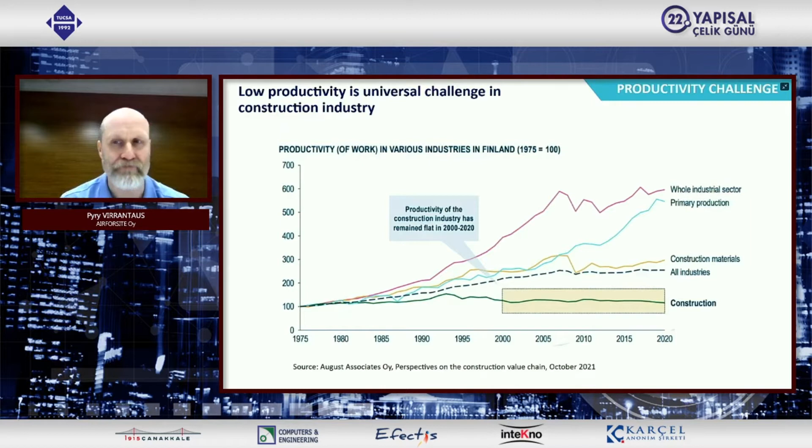Recent academic research shows that there's a huge amount of waste in a typical construction project. According to these studies, there are typical key root causes. The first one is that designs and plans are not good enough to actually succeed in the actual construction project. Second, there's a lack of achieving task readiness at the site given the schedule, and the time scheduling accuracy and timeliness is lacking. We actually see constantly in our clients' cases that the schedule is quite vague, not updated correctly, and doesn't reflect reality.

Third is logistical deviations, perhaps logistical topics like material packaging and accuracy of deliveries to the sites. There's lots to be improved here. We have many clients facing big challenges in getting the right material to the right place at the right time. Finally, number 4 is poor communication. There are hundreds of employees representing several different companies, so poor communication across stakeholders is a quite common challenge in various construction sites.

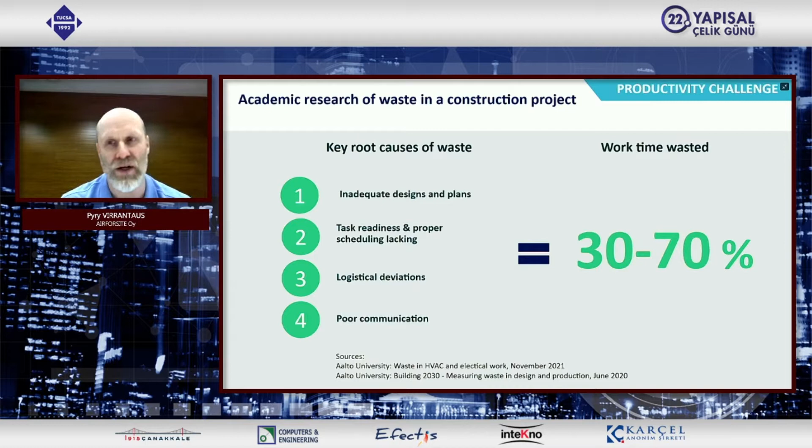Right, so now that we have identified the challenge, what can we do about it? As a company, we bring new, very practical tools for our clients to improve productivity. There are two key parts. How do we do it?

The first one is that we bring situational awareness and visual documentation for all stakeholders. What does that mean in reality? It means we use various tools like site cameras, accurate drone models, 360 video, and so on, easily accessible by any stakeholder through our easy-to-use web-based app, which I'm going to show you at the end of this presentation.

The second important point is that using this data, we and our clients are able to identify very practical points for improvement, also on task level. Combining real-time, transparent data across the site with practical analysis and improvement points, our clients are able to reduce waste and improve productivity by up to 50%. So this is quite a special improvement.

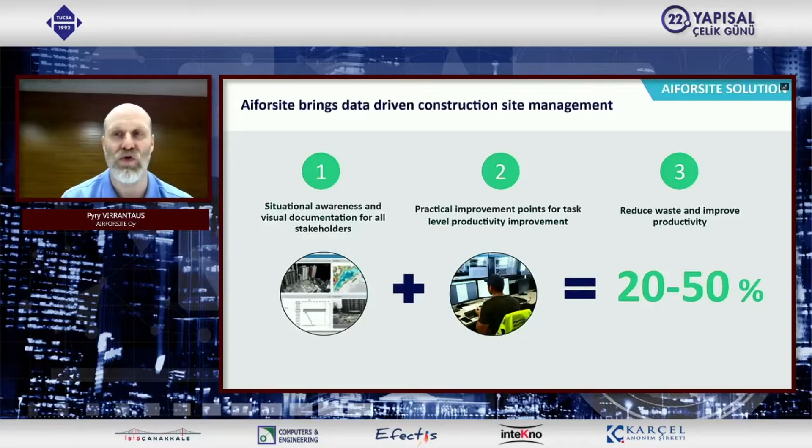So how does this work in practical terms, and how does it really operate within our clients' environments? It's actually quite straightforward in the end. The process is as follows, and this can be used in any construction site regardless of the production methodology - it can be lean production or traditional, it doesn't matter. The point here is that it's like four key steps.

There's a weekly cycle where we provide a productivity report to our clients on a weekly basis. That report is then discussed and agreed as part of the normal site management meetings on a weekly basis. This report includes all the key deviations to the project, like logistical deviations, schedule deviations, and so on.

We also propose corrective actions for those. So it's quite straightforward and easy, for example, for site managers in a project to take corrective action and agree next steps for respective employers, subcontractors, or whoever. This weekly cycle is then taken forward, which also makes sure there's continuous improvement across the project - a very practical, hands-on approach to improve productivity.

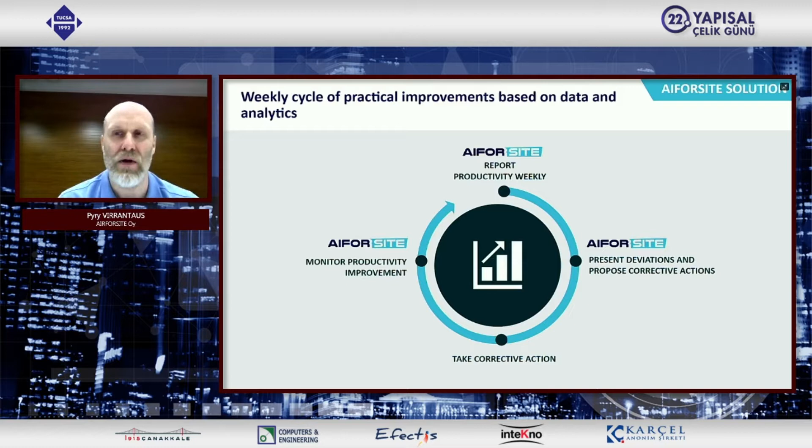So getting the data from the site, analyzing it, taking that into account in weekly site meetings, and building continuous improvement on top of that.

So what are the actual examples? I'm now taking this to a very practical level. What are the actual things that we provide to our clients as part of this solution? There are four key buckets where we provide practical data and suggestions. The first one is work progress - for example, we are able to provide worksite presence data of any worker, which is quite interesting.

As I said, usually this site presence is 20% or less. For example, we are able to show that in this case, a floor contractor's worksite presence has been 21% on week 44. So only 21% of this person's or contractor's work time has been at the actual work site identified by the plans and schedule.

A second part is the actual schedule. As I mentioned, it's quite usual that the schedule being followed doesn't actually reflect reality. We have very good examples of how we can use data to help our clients capture the current situation. For example, in one case, the site video shows that the construction phase is not progressing according to the latest schedule, so we can really prove the actual situation and provide transparency to all project stakeholders.

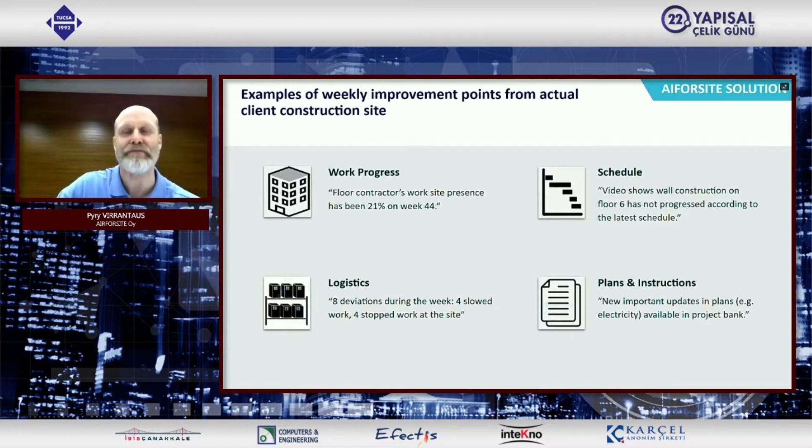So what is the measurable value in these cases? This is a result of an actual, quite big renovation project in the Helsinki area. There's a quite big hotel and office building complex where our services have been implemented for the last 4 or 5 months. During the first months of the project, we were able to identify with the client the following measurable benefits.

First of all, we are able to reduce cost. In this particular case, one of the most important ones was that we measured about 15 deviations that stopped the work at the site per week. With this kind of methodology and technology, we were able to reduce that to 5 together with the client. That means on a monthly level, we were able to reduce 40 deviations, and each of these deviations carries a price tag of 500 euros. So this approach alone helped our client save 20,000 euros per month, which paid for our solution 5 times over.

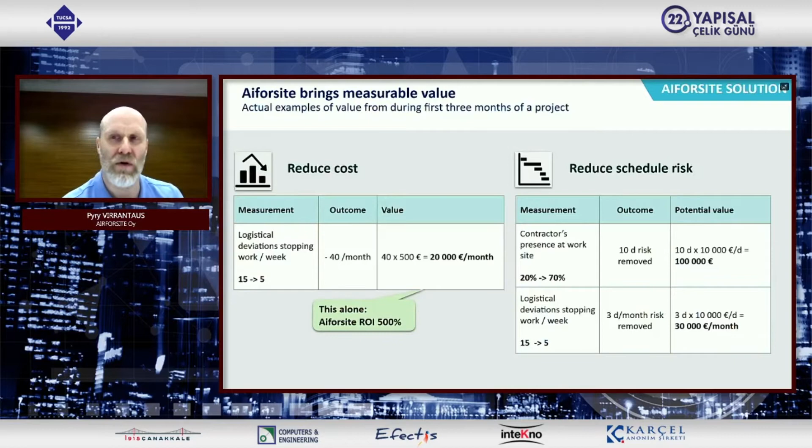So how do we do it in technical terms? I'm now covering the bottom part of this picture to give you an understanding of how this works in reality. We have developed a standardized way to collect data from construction sites. It includes both manual and automated data collection equipment. At the moment, we collect up to 70 gigabytes of data per week per site, so lots of data is flowing from the client sites to us.

These manual data collection devices are, for example, 360 video and drone models. So either we, our clients, or partners make these kinds of 360 video walks and data collection visits at the site, and also fly drones to get the drone model.

On the other hand, we have fully automated and wireless data collection equipment like site cameras. We have a positioning system that enables us to track almost in real time any resource at the site. And then we have various different condition sensors, like air condition sensors, indoor humidity, temperature, VOC emissions, dust. You can measure concrete temperature, humidity, and estimate strengthening and drying, for example.

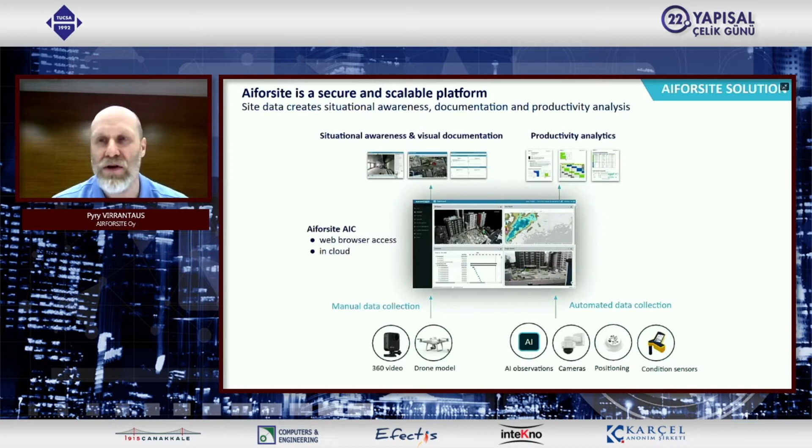All of this data is then transferred automatically to the public cloud, and the user, wherever he or she is, can access it simply through a web browser. This means that through this approach, our clients can have situational awareness and visual documentation across the whole process and project, with very practical productivity analytics and reporting supporting this kind of continuous improvement of productivity.

That was the theory part of my presentation, and looking at my watch, I still have about 10 minutes to go. Now I would like to share my screen showing a couple of actual client sites so you can see what this means in practice.

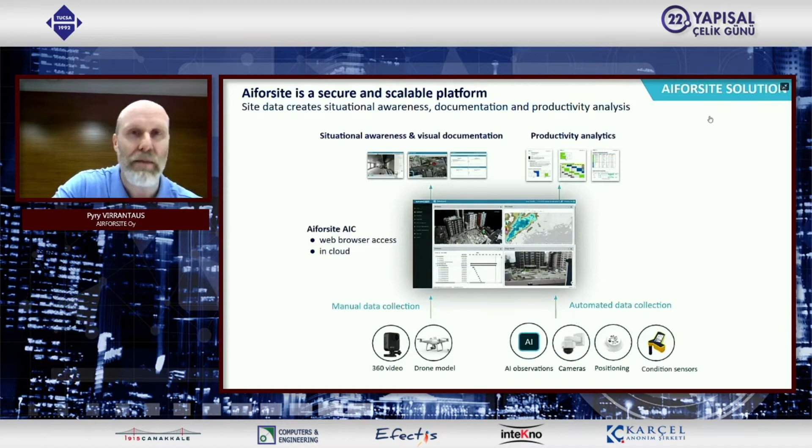So wait a second, I'm trying to share my screen so that you can see. Can someone please confirm that you can now see this kind of site camera view? I assume you can see this kind of view—we have some cameras on the screen.

So this is now a real-time view for you all from one of our clients. This is a quite big bioenergy plant being built here in the greater Helsinki area. They have been our client for about 18 months. In this case, the point is that we have various site cameras across the project site, and each of these cameras can be taken into closer scrutiny.

For example, each camera takes one still image per minute, and I can easily go to whatever time I like. Let's say I would like to go back one day per click. So here you can see, for example, I can go clicks of one day back. So this is one way how we provide this kind of visual documentation.

I can also select whatever time from the calendar and pick any time of the day. And there you have it. In this case, it was a bit rainy. But what is quite interesting is that I can also turn on real-time video.

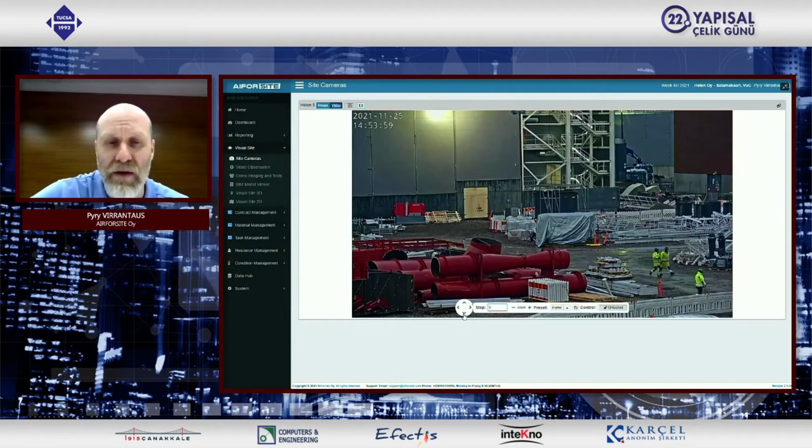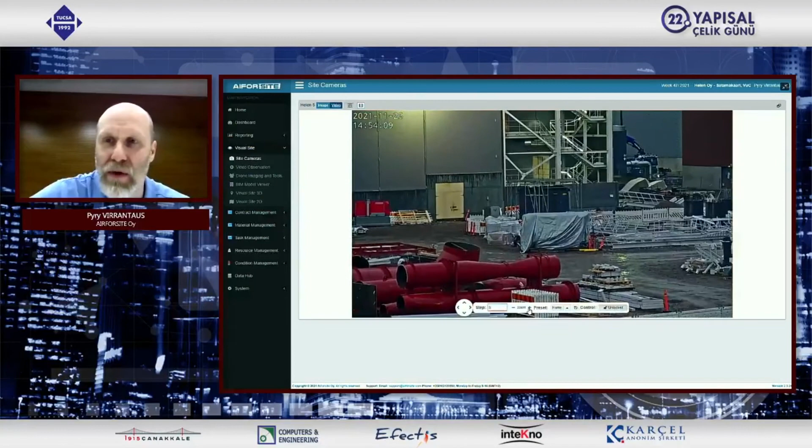As you can understand, you can use this kind of information in various use cases. You can discuss with your team. You can utilize different stakeholders' views on how to proceed. Is the status as needed? You can prove certain things, and if you're, for example, the owner of the project, you can really see what is happening. So this kind of visual transparency is now possible.

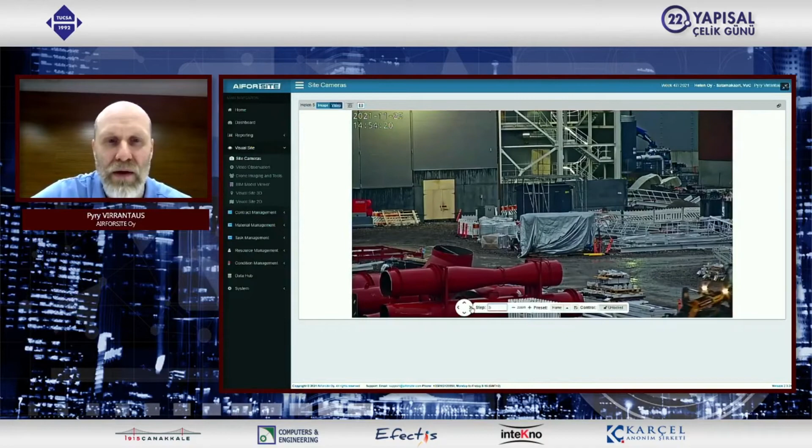So this is quite a powerful tool alone. As I said, I can freely rotate the view, zoom in and out as I like. Now I'm returning the camera to its original place. So now you have a brief understanding of this kind of visual approach from our system.

So that was about site cameras. What else can we do? Given the time constraints, I'm going to show you only a couple of, how would I say, the most visual things. So the next part would be drone imaging.

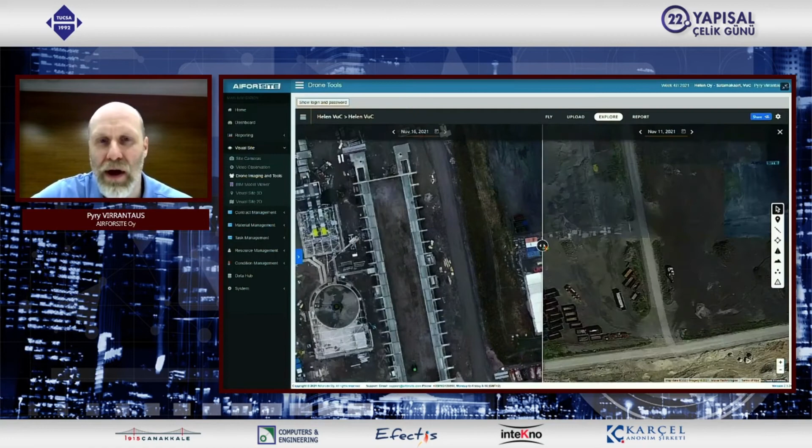The point here is that, as I mentioned, we or our clients can do these drone flights. The outcome is about a 1 centimeter accurate 3D point cloud model of the site. So I'm now looking at this construction site. I can do various measurements, comparisons and whatnot. For example, compare the situation now against a situation a week ago. This is quite a practical tool for discussing at site management meetings and whatever else is needed.

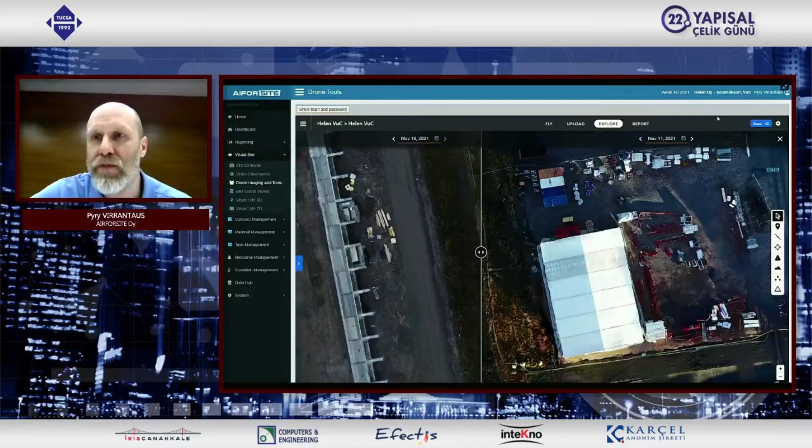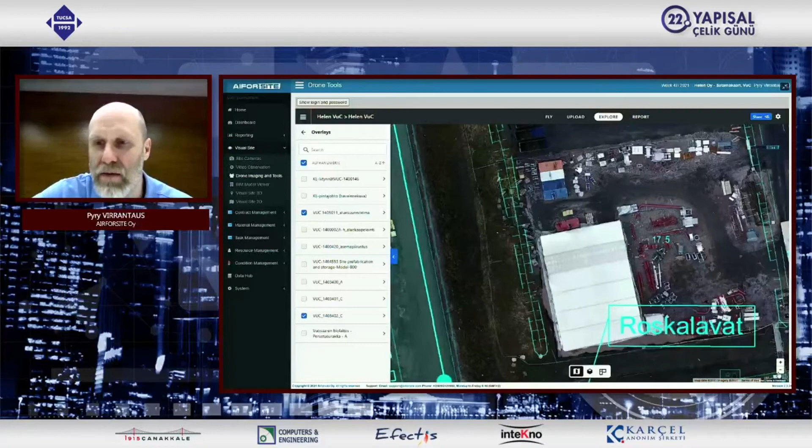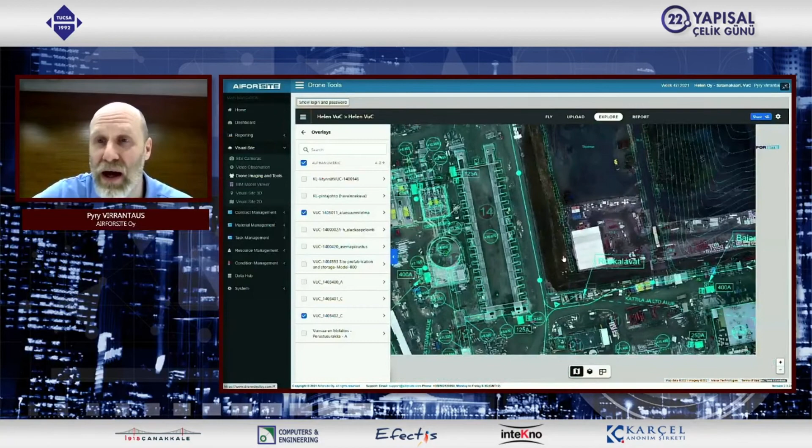Then, using the drone imaging, you can also do other things like putting different overlays or plans on top of this. This is in real coordinates, so you can see how your plans are matching the reality, or you can do planning forward. In this case, the client has used various plans to overlay on the drone image. Quite handy.

I can do also whatever type of measurements, for example measurements for volume. I just select an arbitrary example here. Now you can see that the volume of this area I chose is about 500 cubic meters. So I can do various measurements in a matter of seconds.

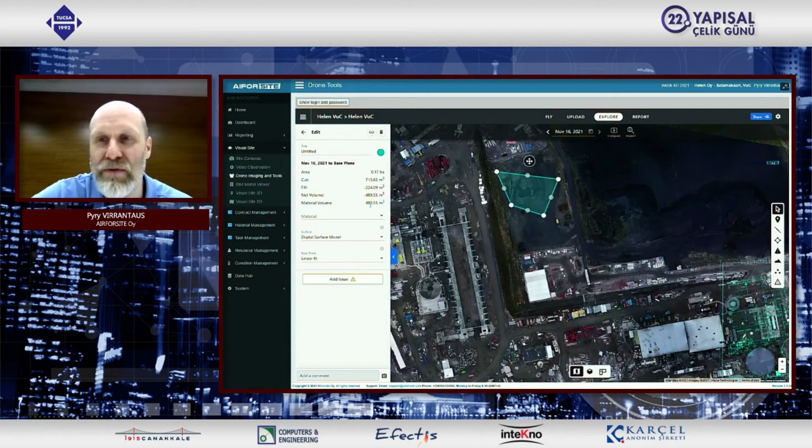Finally, as I mentioned, this is a 3D model, so we can also utilize that if needed. That was about drone imaging and related tools. Let me just briefly check one thing. Then I would like to show you two more things.

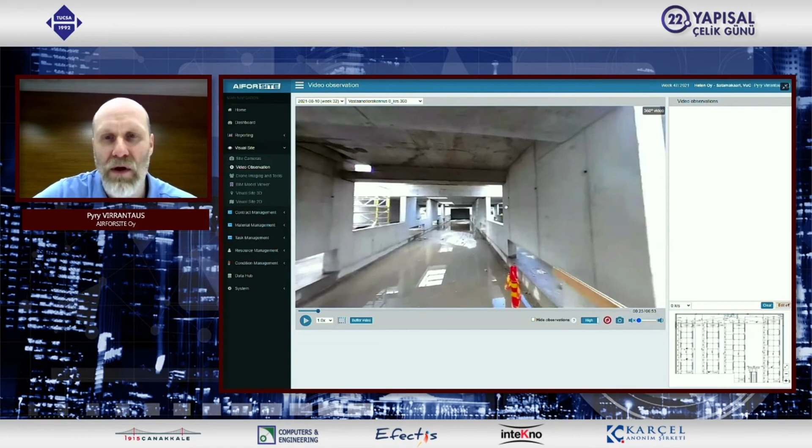The next one is 360 video recording. So what does it mean? It means the following: now you are about to see video footage taken at certain times. Usually we do this on a weekly basis. It's a 360 footage which you can freely rotate as you like, and since it's a video, you can easily start watching the site visit during that time.

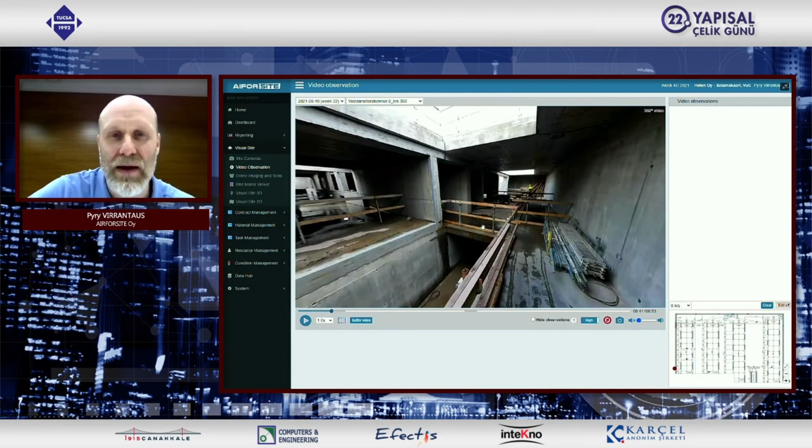Once again, the picture might be a bit flickery on your end, but I'm seeing it flowing smoothly. The point here is that every user can really see what is happening and what has happened. I can always use this as visual documentation. If I need to go back in time, especially for a dispute resolution case, where someone is claiming something went wrong and asking who did it and how, we can go back and see the real situation in a specific time and space.

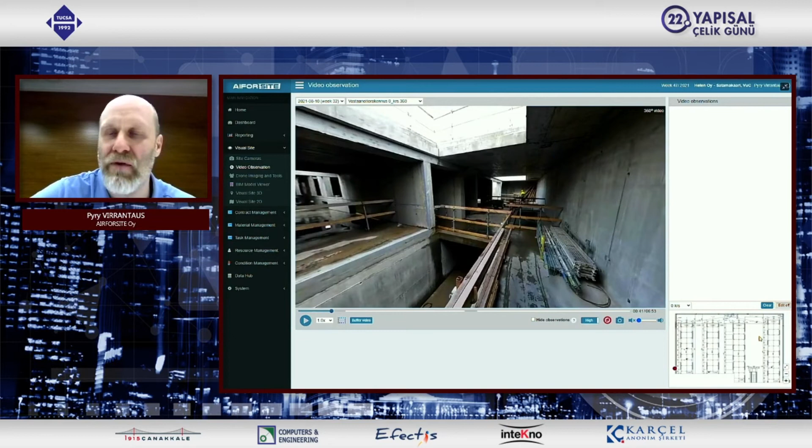I can also utilize these floor plans to move the video to any specific place. So it's quite a practical way to document the whole project and also provide this kind of insurance against various challenges, like disputes or the need to go back in time and see what is under a certain structure, for example.

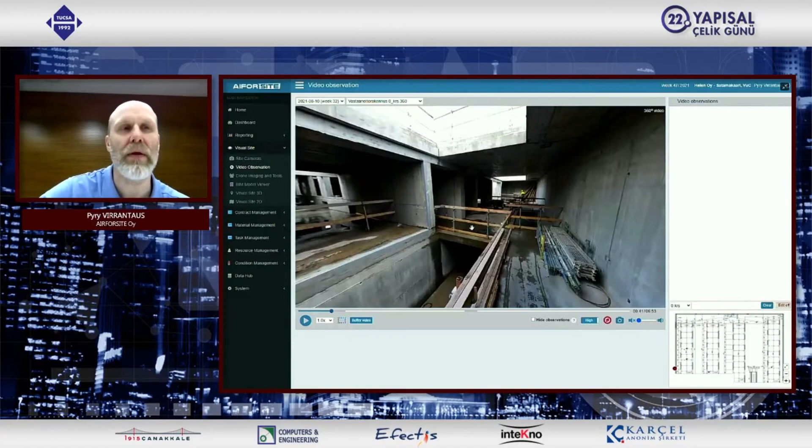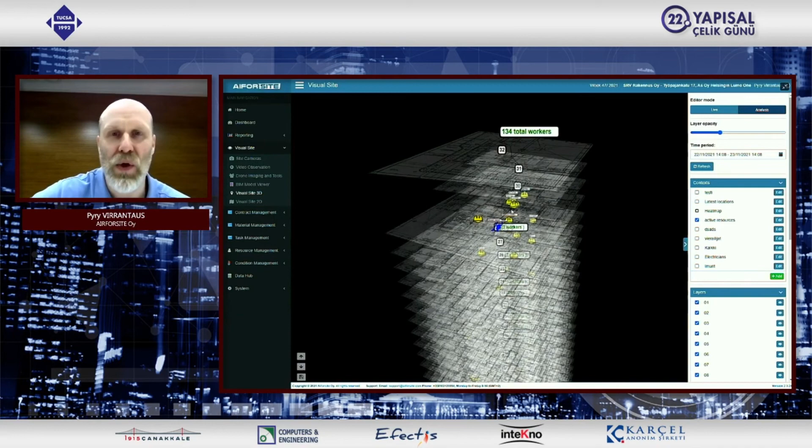The next one I would like to show you is quite unique. This is about the positioning system, meaning that we can track each and every resource we want at the construction site. In this case, you are watching a certain client of ours. This is a 32-story building, and in this particular case, each and every worker is being tracked by this solution.

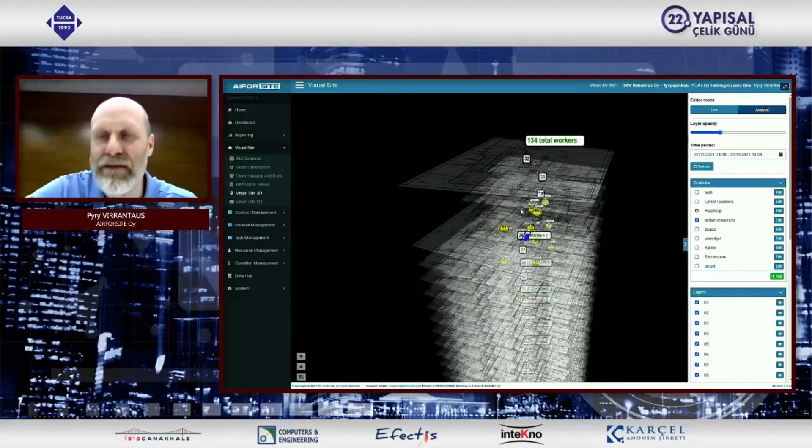Each person carries this kind of small tag. It weighs about 10 grams, and you can put it in your pocket or on top of your hard hat, and it provides wirelessly and automatically the position of yourself within the building. The outcome is, as you can see here, I can see at all times where my people are located, and the use cases are two key ones: people safety and productivity measurement.

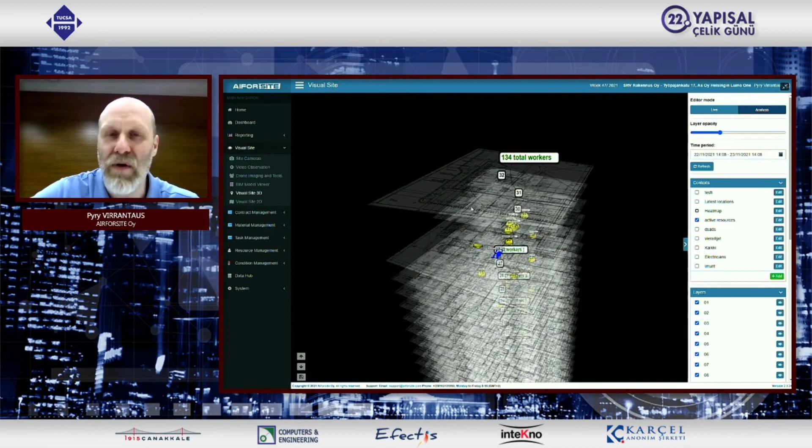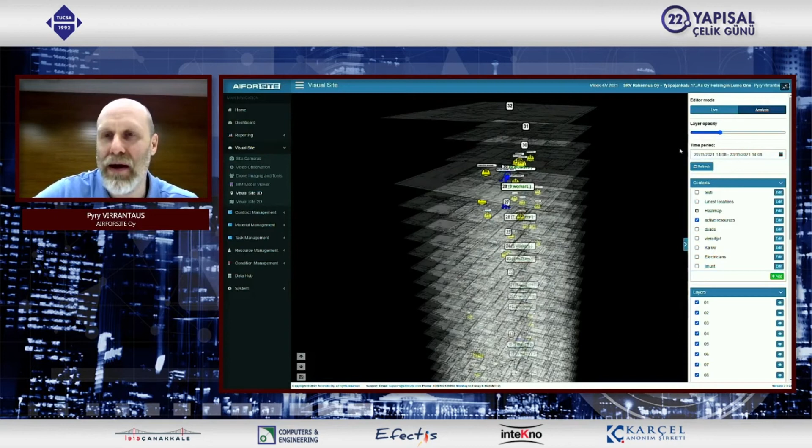Safety is quite important because, as you know, if there's a fire or certain need for evacuation, you always know where your people are, so that is very important. The second thing is that now that I have this kind of data, I can analyze it against the schedule, so I always understand, are these people and resources in the place they should be? This is quite important information.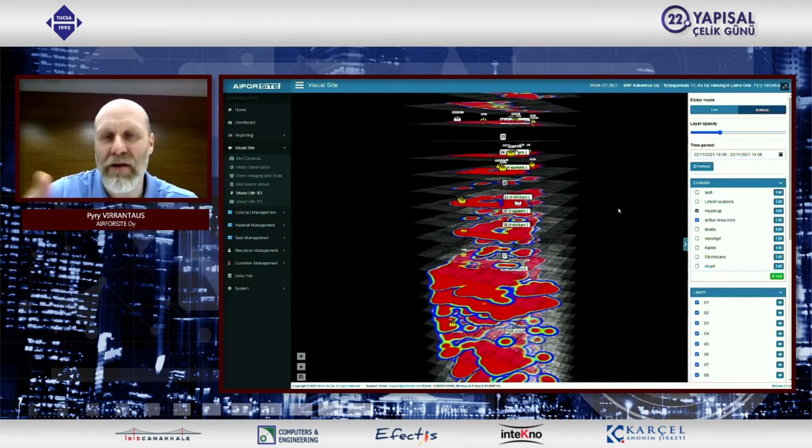I can also visualize it using heat maps. I can see visually where each and every resource is. I can obviously filter these resources. I can drill down to individual workers or groups of workers, so I have this kind of visualization of the movements and so on.

I can also easily have the analysis of this data. For example, let's take the last couple of days, from Monday to Tuesday, I would like to know where my resources have been in practical terms. So now it's calculating that information from the cloud, and in about 10 seconds we get the data.

Just a second, there's actually quite a lot of data because there's like 500 employees at the site, so now we will get the results in a second.

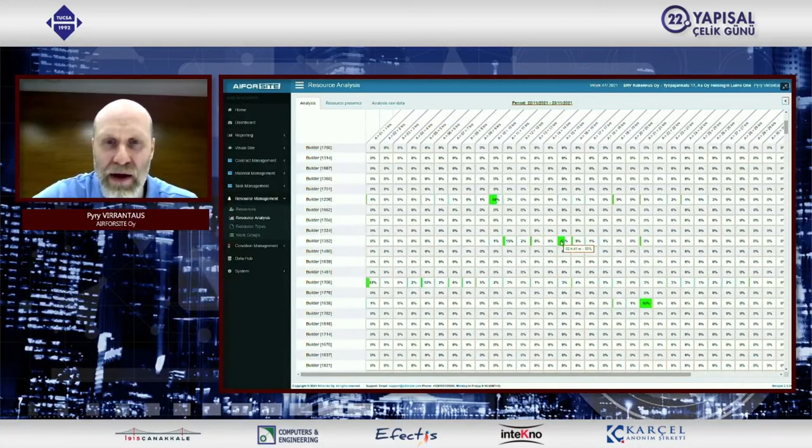There we go. So what you see here is that each and every resource is on the vertical axis, and the horizontal axis shows in this particular case each and every floor of the building. We can also divide these areas as we like, but it shows how much time these individuals have been spending on what floor of the building given these two days. For example, this builder has been spending his time as follows, and then I can drill down to specific things. So you can immediately see, are these people where they should be, and if not, you can take action.

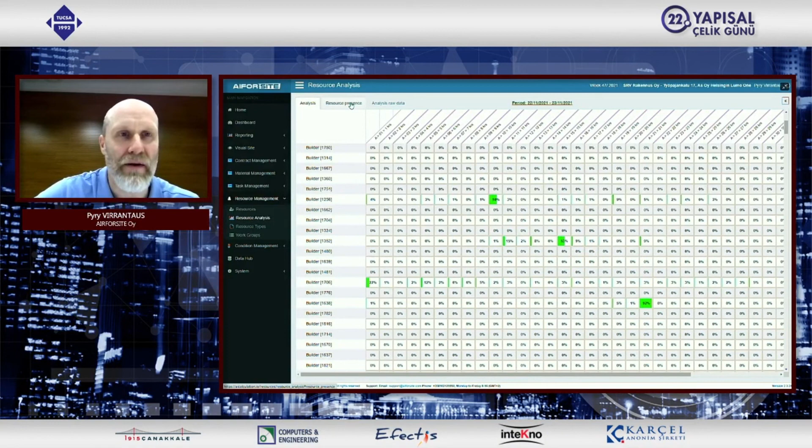I can also have this kind of presence analysis, so I can see immediately in terms of the locations where these individuals have been spending their time. I can also drill down and see on the actual floor plan where these people have been spending their time. So once again, if you're running a project, you always know where your people are.

It's a safety feature, and also you can analyze their productivity by comparing where they have been spending their time and where not. So this is quite valuable data when we start to really make sure that the construction project is flowing optimally.

As I said, I wanted to give you a very brief demo of some of the key visual features. These were the three ones I wanted to share with you today. It seems that I have now taken my time.